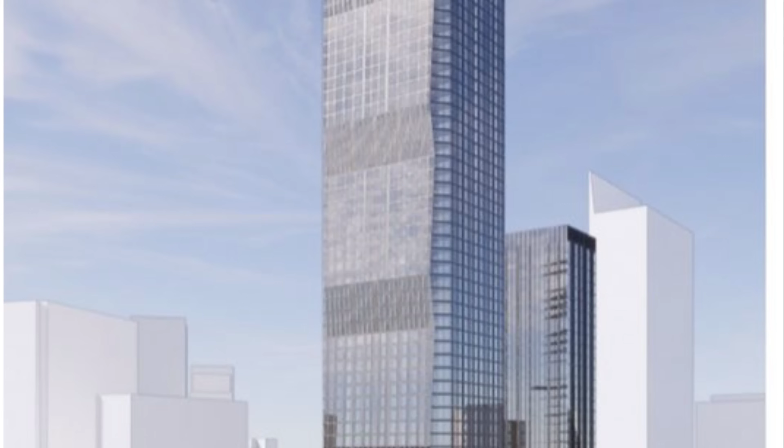Fact number 1, it will be 246 metres tall. Actually the exact height will be 245.65 metres, that's 805 feet 11 and a quarter inches. It will be the tallest outside London, actually the UK's 3rd tallest after the Shard, 87 floors, 309.6 metres, and 22 Bishopsgate, 62 floors, 278 metres.

The Tower of Light, designed by Mike Tonkin and Anna Liu, is actually a decorative facade to hide the chimney of the Civic Quarter heat network. It's 40 metres tall, but just imagine if it was scaled up to a 240 metre high residential building. Wouldn't that make a nice addition to the skyline?

Fact number 2, Viadux 2 will have 76 stories, so each story is around 3.23 metres. Interesting calculation.

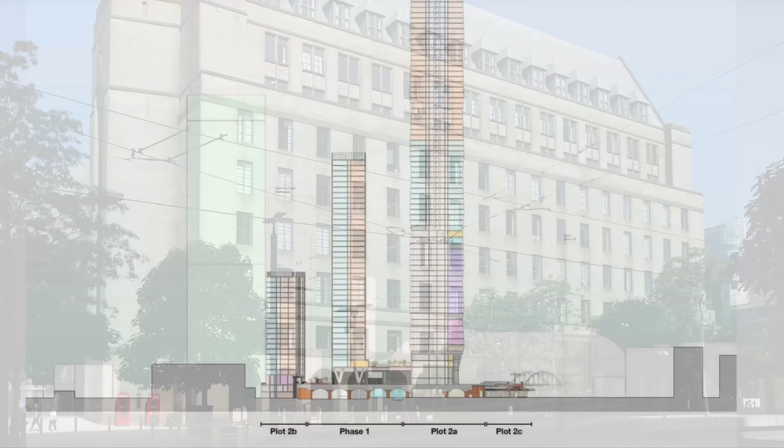Fact number 3, it was approved by 7-3, so 3 members of the planning committee objected. Historic England said it was too tall, but what's done is done. The new tower will be placed in the middle of the car park, at the far end of Manchester Central, whose management have complained because it reduces the parking space available for exhibitors and others using the complex. The developers say they will work to resolve the problem.

The tower will be constructed almost exactly where I took this photo on colour slide film in 1982. The Britons Protection Pub, Axis Tower, Viadux 1, the Metrolink Bridge. This is the junction of Lower Mosley Street, Great Bridgewater Street, going from left to right, and Albion Street, going straight on over to the left.

Let's have another look into the past. That's the junction with Great Bridgewater Street, 1954, with adverts for Belle Vue Zoo and Circus and the 1953 film The Heart of the Matter, so it is definitely 1954.

Now we go back to 1896, where the entrance to the new tower will be located. The sign says Robert L. Bostock, Corn and Flour Factor. By the 27th of August 1900, the use had changed: Furniture Exchange and Mart, it says, and on the bridge, Salt Company Brewers of Burton-on-Trent. The bridge is still there today, and in a few more years, this is how it's going to look.

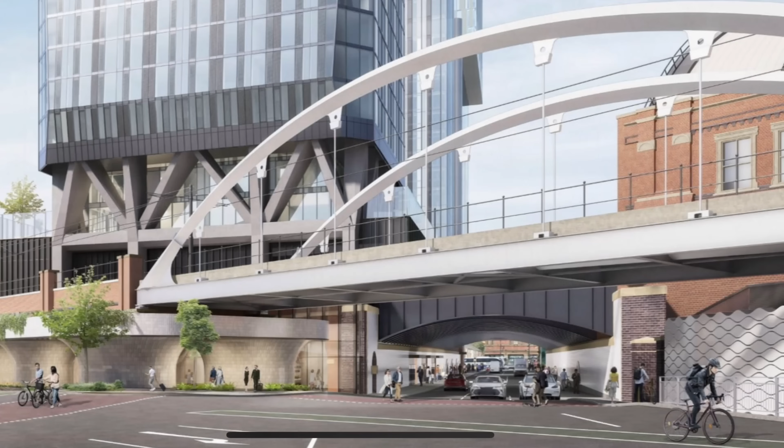Fact number 4, the tower will be named Nobu Manchester. The building, including apartments and hotel, will be operated by Nobu Hospitality LLC, founded by Nobu Matsuhisa, age 76, Robert De Niro, 81, and Meir Teper. They have restaurants and apartments all over the world.

Fact number 5, the developer is Salboy, co-founded by Fred Done, now 82. And I read that he got to know Nobu on his travels and had the ambition of bringing them to Manchester. It seems reaching retirement age doesn't mean giving up on ambitions.

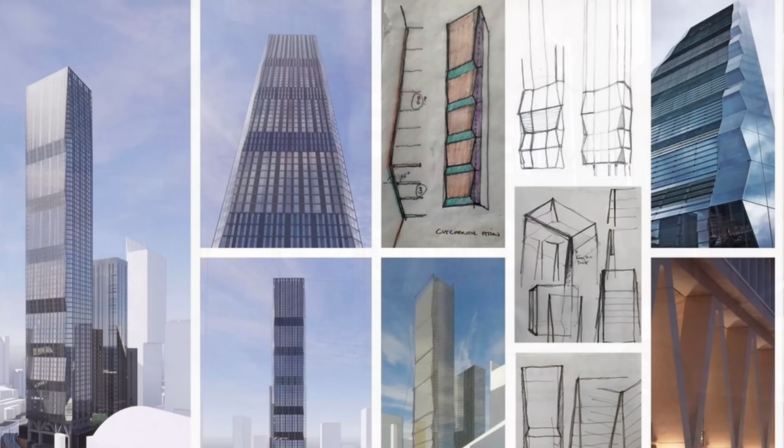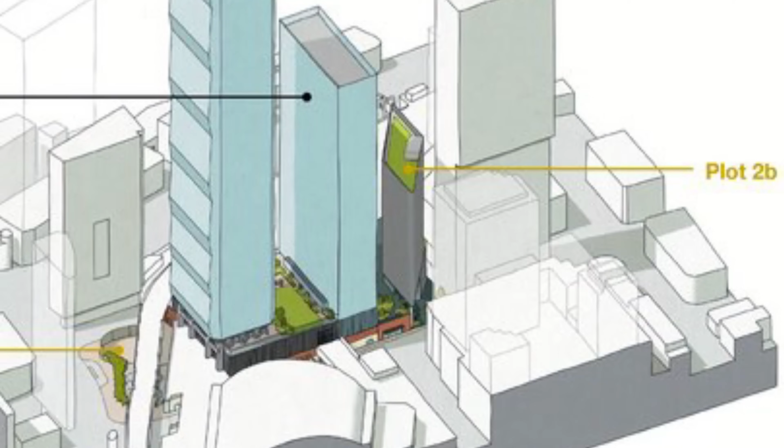Fact number 6, there will be 452 Nobu branded apartments. The publicity states you can live the Nobu lifestyle. Fact number 7, the hotel will have 160 beds and will be Nobu branded. By contrast, there will be a 23-storey building with 133 apartments classed as affordable.

Fact number 9, the architects are Simpson Haugh, and I see they've been trying out the beveled zigzag design on their contour apartment blocks.

Fact 10, it will generate £1.5 million in council tax, I think that's per annum, for Manchester City Council.

Fact 11, the hotel will employ, it said, over 160 people. Fact number 12, the build will generate 8.1 million GVA, that's gross value added, which is defined as the value of goods and services produced in an area, industry or sector of an economy.

Fact 13, the original application was made in March 2024 for 782 apartments and resubmitted in November 2024 for 452 apartments and the hotel. 14, it was approved on the 10th of April 2025. In total, it took just over a year to get planning permission.

Number 15, the tall tower will go on plot 2A, the smaller building on plot 2B. 16, construction will take 5.5 years, so it will be completed in 2031, 100 years after completion of the Empire State Building. That only took 1 year and 45 days to build. 17.

The reference is 139715/FO/2024 if you want to spend a few days, or weeks, or maybe months, studying the detailed plans.

We continue down onto Whitworth Street West to look at another project approved along with Viadux 2. Interesting, an all-electric bus from London on trials with the Bee Network. I love today's buses. Whitworth Street West is connected with the Hacienda nightclub, and later Deansgate Locks appeared, like Viadux, reusing old railway arches.

Just opposite is the site of Whitworth Street West, the second building given planning approval. Let's add some more facts. Fact number 18: it is named after the street, Whitworth Street West, and the address is 2-4 Whitworth Street West. Very nice address, Tony Wilson will be proud.

Number 19, it has 44 stories. I can't find any info on the exact height, but it must be around 140 metres using my earlier calculation. It will contain 364 flats of 1, 2 and 3 bedrooms.

It will stand on the site of 2 older buildings. I've photographed them just to document what was there. They haven't been in use for a while. They are characterful and attractive. It's always a dilemma whether to destroy the old to make way for the new, but times change and the decision has to be made.

It consists of 2 parts, 12 and 33 stories, quite tall. It's a PBSA project, purpose-built student accommodation. Developer is Vita Student, who have built student residences in London, Barcelona, Coventry and other cities. Fact 28: Tim Groom Architects have designed the buildings.

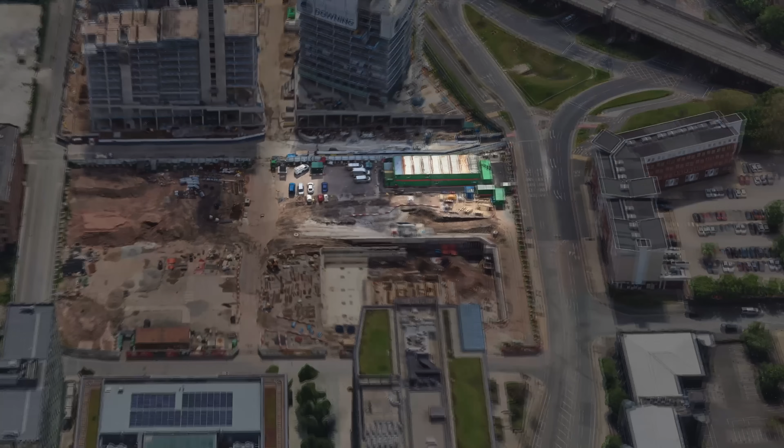Fact 29: there will be 841 student beds, with 129 rooms classed as affordable. Number 30: it said that this project could contribute £26 million GVA, now you know what that is. If you're curious to find out more, the planning application number is 141786/FO/2024. Just do a search for Manchester Planning Portal.

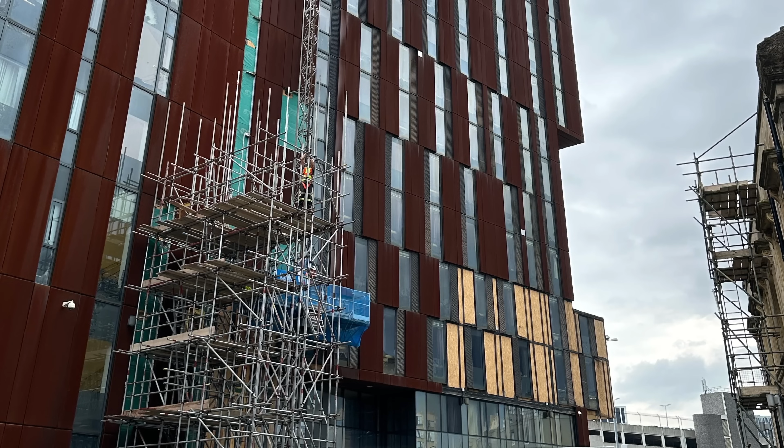So that's it: 3 different towers, 3 different markets, 3 different styles of modern architecture. But how will things look in 10 years or 15? In Leeds, the student residence broadcasting tower, where my daughter lived in her first year at uni, is being completely stripped out and refurbished with the addition of new cladding. It was opened in 2009.

I noticed that the Vita Tower will also make use of this site nearby, which I mentioned in a previous video. On the east side of the construction site, we can see an empty plot. How long will it be before this area starts to sprout cranes and a concrete core starts to arise? It won't be built on, but it will be used as the construction site compound.

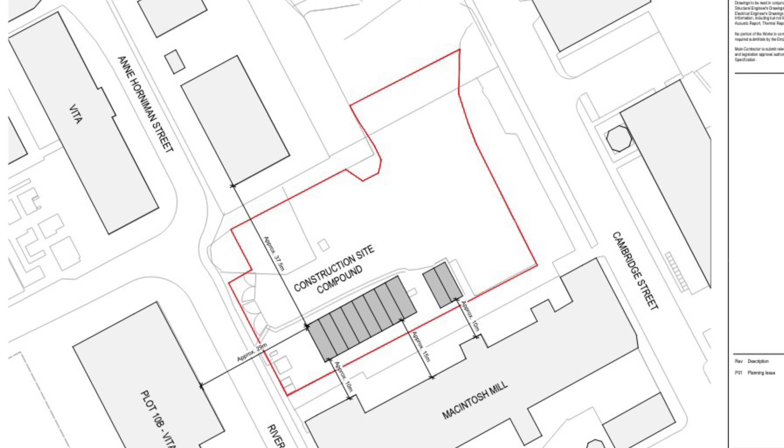And while we're in this part of town, just a quick update on the Hotspur Press redevelopment I featured recently. Developers Manner have changed the height and exterior of the tower. It's reduced from 37 to 35 stories, and it will have an aluminium facade, said to provide a visual separation with the brickwork of the old building.

Let's return to our starting point, Lower Mosley Street. So, more changes in the pipeline, more additions to Manchester's skyline, praised by many, criticised by many. One comment I saw somewhere suggested instead of tall buildings they should build classy Georgian-style houses.

But it's already been done. This is Oxford Court, an office development constructed in a mock Georgian style, I believe in the late 1980s. One distinguished architectural commentator trashed it, saying it was a load of rubbish, a retrograde pastiche and absolutely hideous. But I think it's okay.

This is Manchester. There should be a place for modern and traditional, high-rise and low-rise, cutting-edge and kitschy. But that's just my opinion. I'm just here to document, to describe and explain, an independent observer, the guy on the street, not an industry insider, an eyewitness to what's happening.